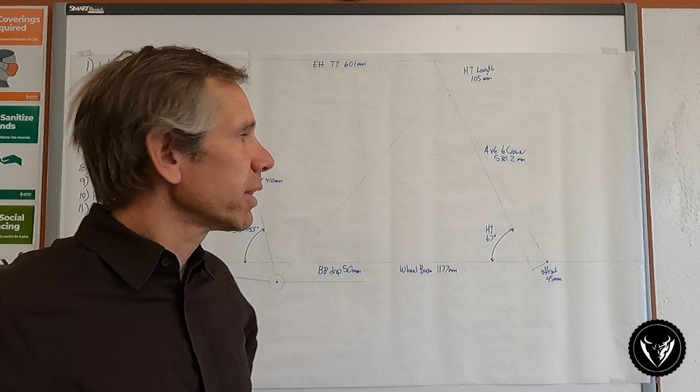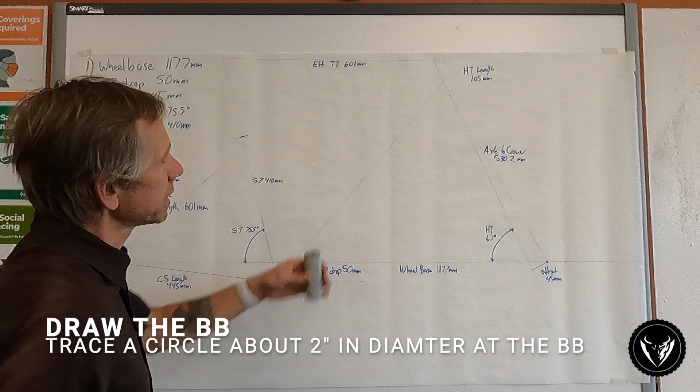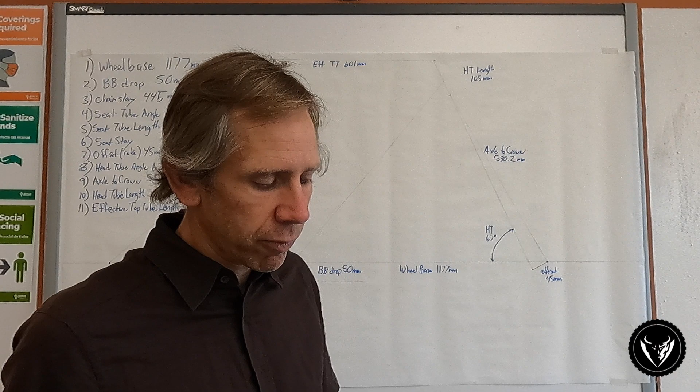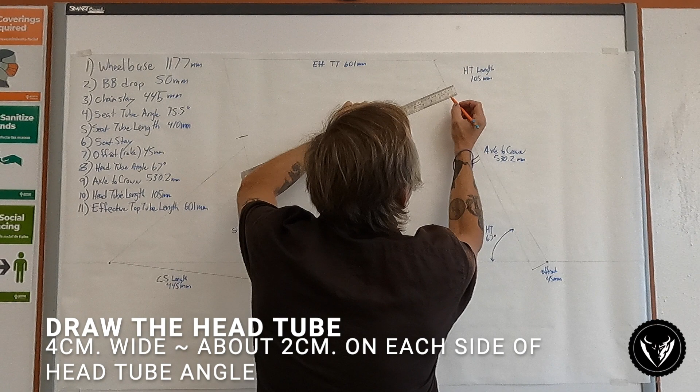All right, now that we've got all the angles and the skeleton of the bike frame made, we're gonna start drawing the tubes on top of that. I've drawn the BB right down here. Next thing I'm gonna do is the head tube. The head tube thickness, or the width of the head tube, is around 4 centimeters. So what I'm going to do now is on my head tube here, if it's 4 centimeters, I can put 2 centimeters on one side, 2 centimeters on the other side.

Do the same thing up here. Put 2 centimeters on one side, 2 centimeters on the other side. Draw myself a nice perpendicular line. And then connect my 2 centimeter marks. So there's my head tube.

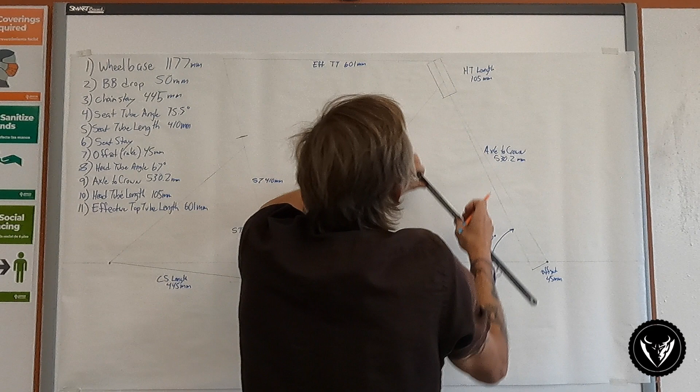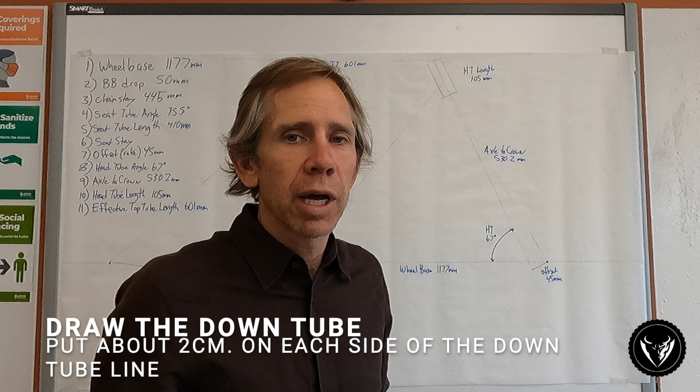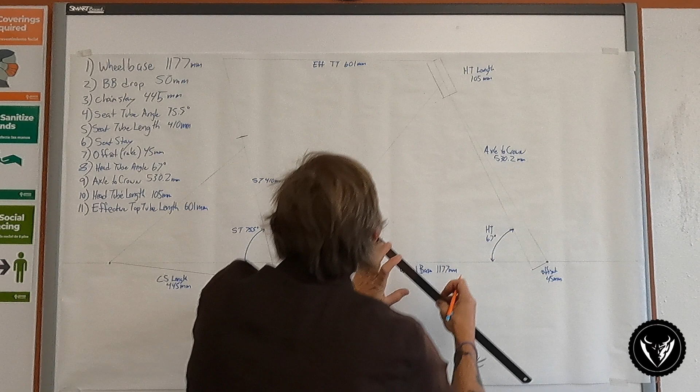All right, now my down tube. Down tubes can be all different thicknesses. I think I'm gonna stick with that 4 centimeter thickness just for right now. So I'm gonna do the same thing. I'm gonna come up here off of that line earlier. I'm gonna mark 2 centimeters on the top, 2 centimeters on the bottom. Come down here and do the same thing. 2 centimeters above it, 2 centimeters below it, and then I can connect those lines.

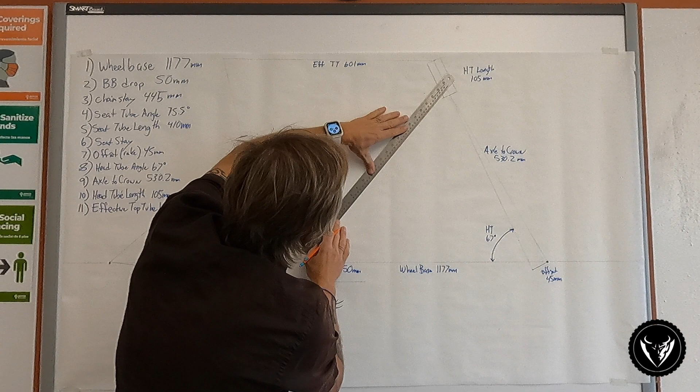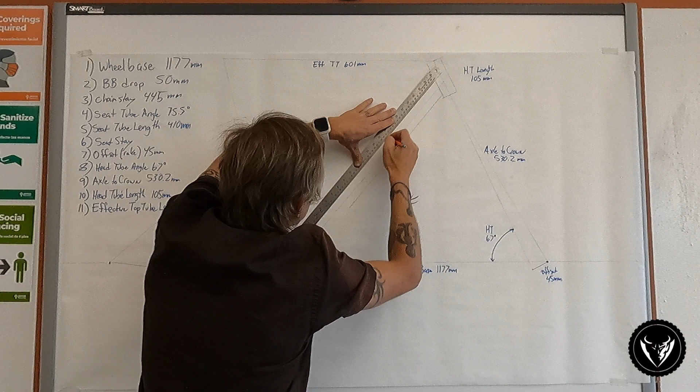One of the things you really want to be careful of is making sure that the bottom of your down tube has some room here at the head tube. So again, connecting my line above it. And then I'm going to bring that line all the way down to the bottom bracket. All right, so I got my head tube drawn, down tube drawn.

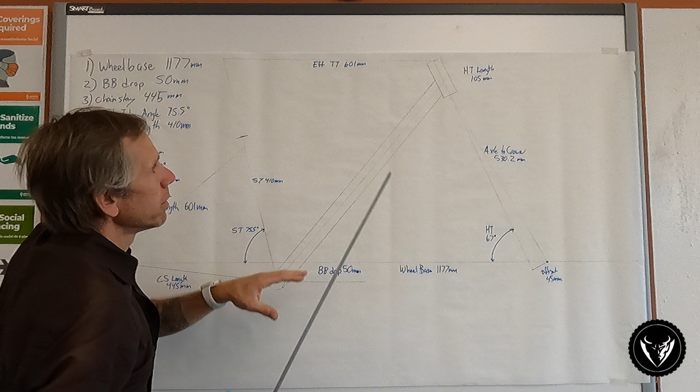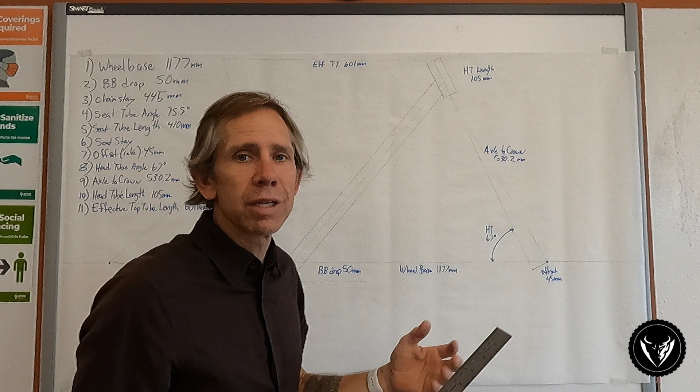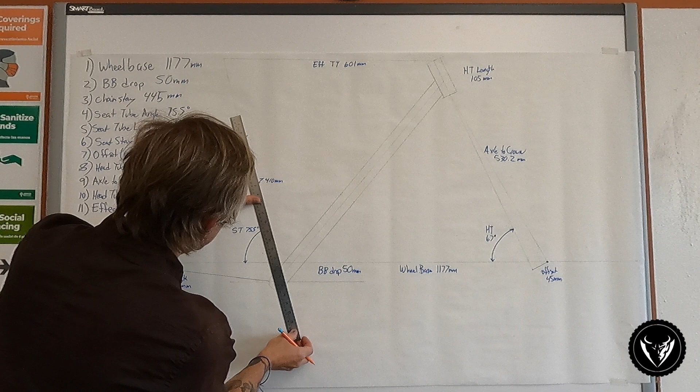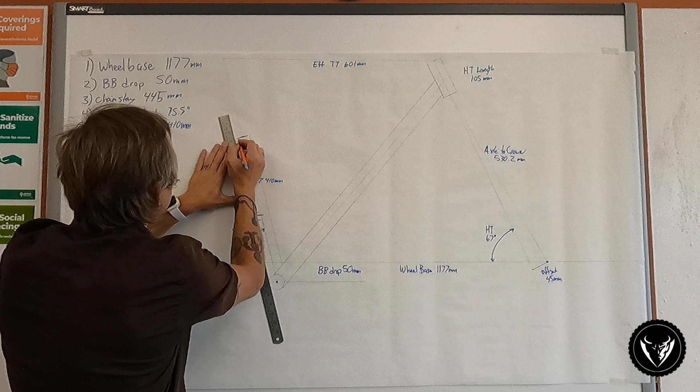Now let's go ahead and draw the seat tube. Again, I want to stay with that 2 centimeters on each side. So using my ruler, 2 centimeters here, 2 centimeters there. Come down here, 2 centimeters here, 2 centimeters there. Now in reality, if you knew the diameters of the tubes that you were going to be building your bike with, you could actually measure all those. But for right now, we're just going to use kind of the 2 centimeter rule. I'm going to connect those again. So there's my seat tube.

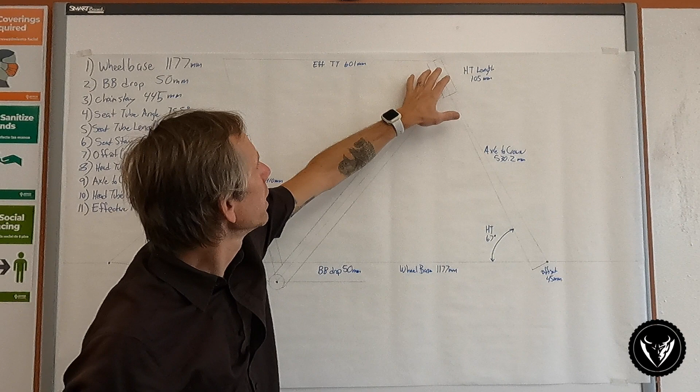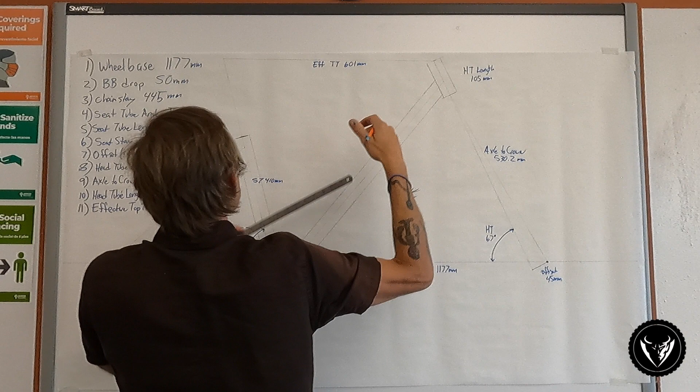I've got my seat tube drawn, and now I need to connect my seat tube up here to my head tube. I want to give a little bit of space here at the top of the head tube, and this will be the top of my top tube. And again, I don't want that to hit here on my seat tube. I need to go down a little bit. We usually have a seat collar or some sort of clamp. So I'm just going to go down about 1 inch and connect these 2 lines. When I'm connecting these lines, I'm going from the outside of the tube to the outside of the other tube. All right. So there's the top of my top tube.

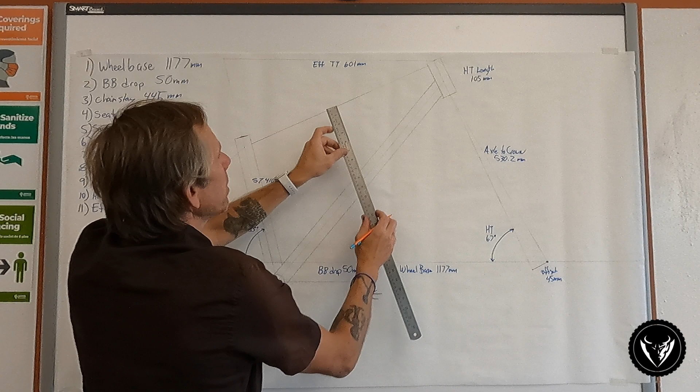This one I'm going to make a little smaller. I'm going to make it 3 centimeters. So I'm just going to measure right here, 3 centimeters. Measure right here, 3 centimeters. So this will be the bottom of my top tube. And again, I'm just connecting the outside of my head tube to the outside of my seat tube.

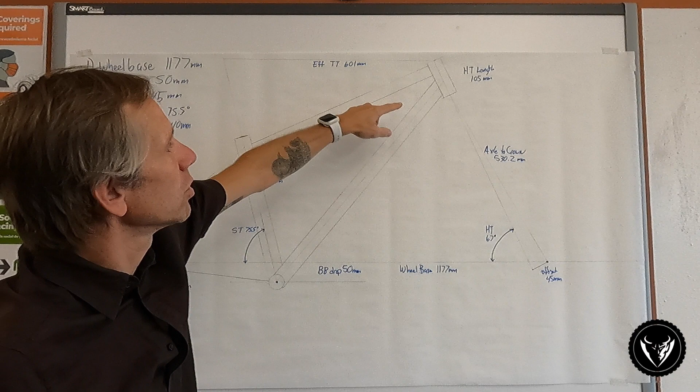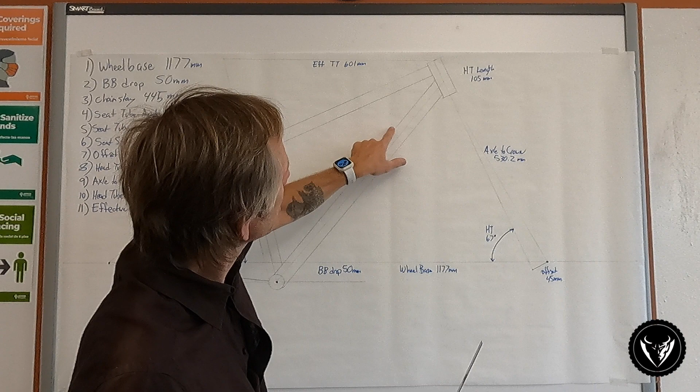And now I'm going to just draw the middle line, or the center line. It's always really nice when you have a frame drawing if you can see the center line of the tubes and the outline of the tubes. My center line, I'm going to try to draw a little lighter. If you notice here, I'm drawing darker on the outside and trying to do a little lighter on the inside.

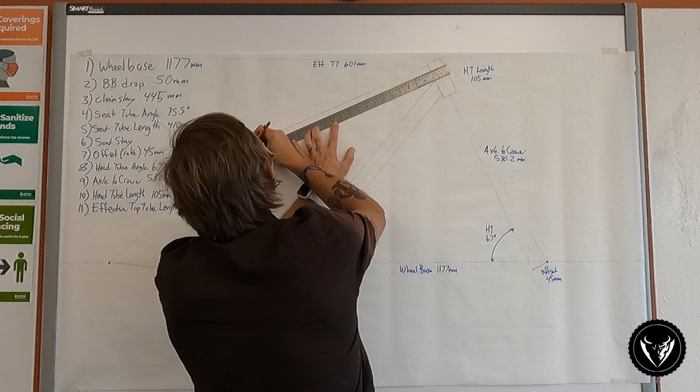So here I'll be connecting the center line of the seat tube lightly to the center line of my head tube. All right,

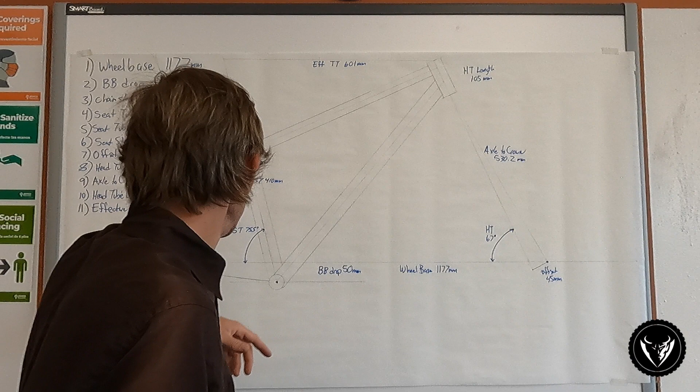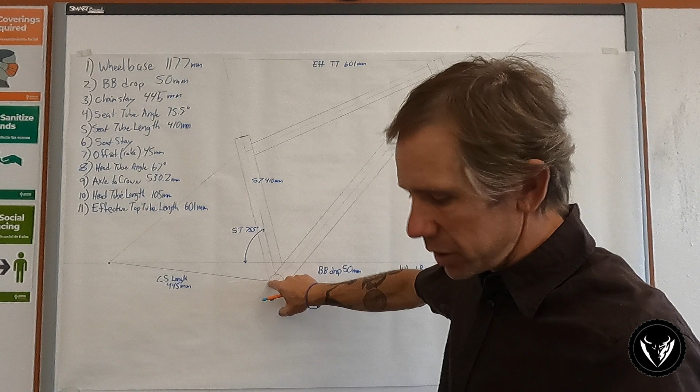now that we've got the front triangle done, we'll work on the rear triangle. The rear triangle, again, those tubes are going to be smaller diameter tubes. So what we'll do is we'll probably just use 2 centimeters here on the chainstay, and then we'll probably use 2 centimeters up here on the seat stay.

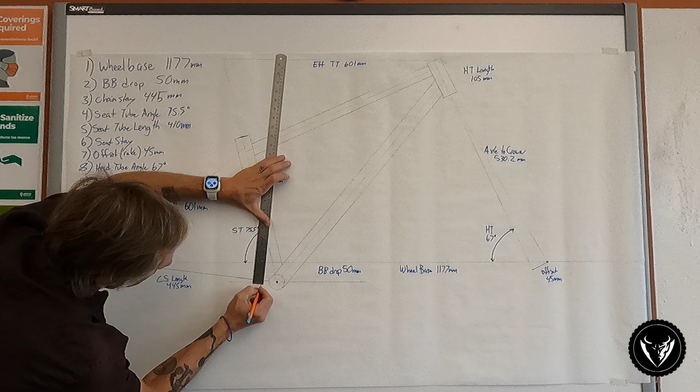So this time I'm going to center my ruler. I'm going to put a centimeter below it, centimeter above it, come over here, put a centimeter below it, centimeter above it. I'll do the same thing, and then now I will connect those, and we'll go from the outside of the bottom bracket to our dropout area. Same thing here. Again, darker lines for the outside of the tubes.

I got the chainstay drawn, and then now I'll do the seat stay. Seat stay, same thing. I'm going to use that 2 centimeters. So I'll put a centimeter below, centimeter above, come down here, centimeter below, centimeter above, connect these with darker lines. All right. So there you go.

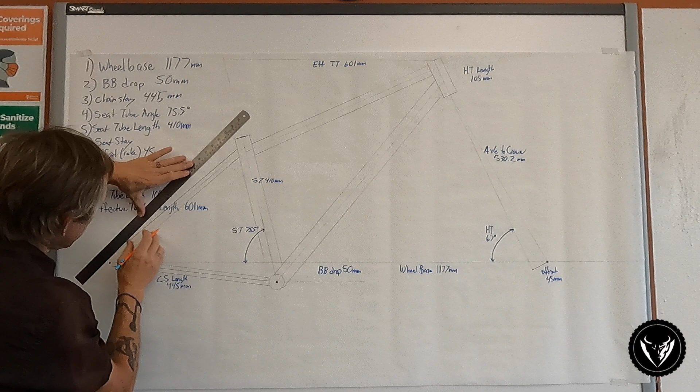Congratulations, you've drawn your first bicycle frame. We're gonna practice this a couple more times before you start working on the real frame that you'll make. But I hope you understand that process. It can be a little overwhelming, so hopefully you've taken a chance to take the video, stop it, pause it, do your lines or your measurements, and then do the work, and then watch the video, stop it, pause it, do your work. Because trying to watch this and do it afterwards might be a little challenging.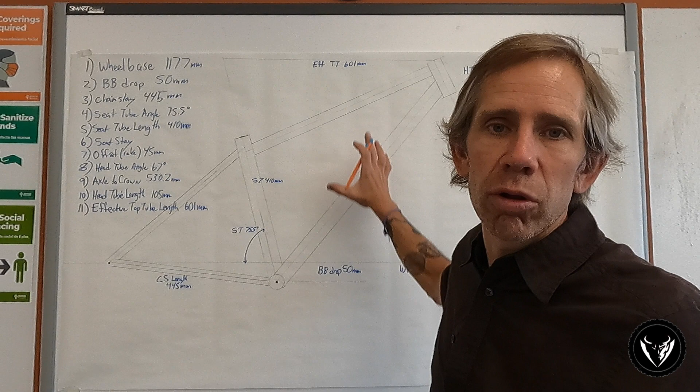But my next thing I would do is I'm actually going to go through and I would color this frame in, so that way we can actually see on this piece of paper where the frame's at.

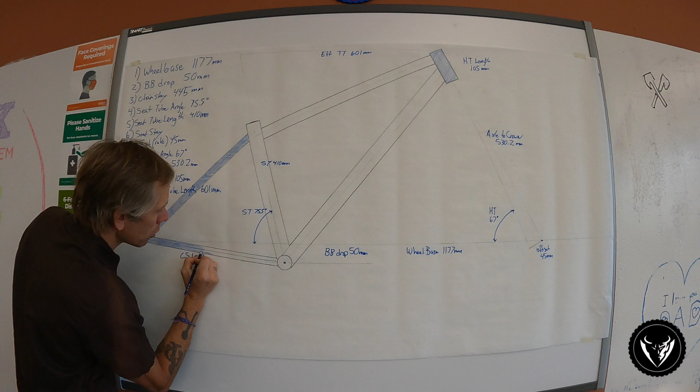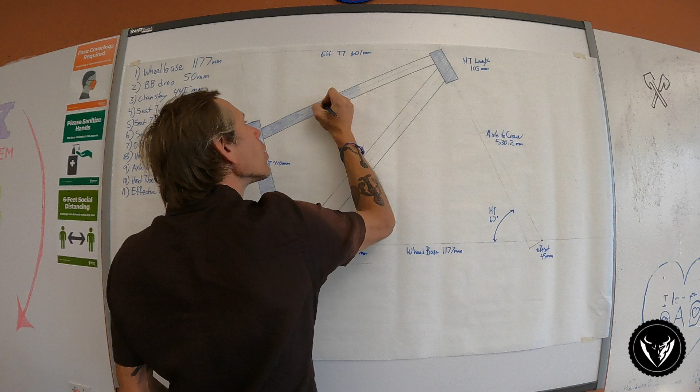All right, as you can see, I got my frame drawn and colored in. The first thing I did was I outlined it, and I used a kind of a darker black marker to do that. You can kind of choose however you want. And then the next thing I went to is I colored it in. You can kind of color it with anything. I use colored pencil, you could use crayon, you can use marker.

But now you can see I've got a completed frame drawing. I got all my tubes labeled, and I got my angles marked, and the frame's colored in, and so now it looks like a real bike frame. So good luck with it. I'm excited to see what your designs and colored in frames are going to look like. So feel free to be creative with it. I was kind of rushed for time, so I just filled it in blue, but you can kind of do what you want with it.

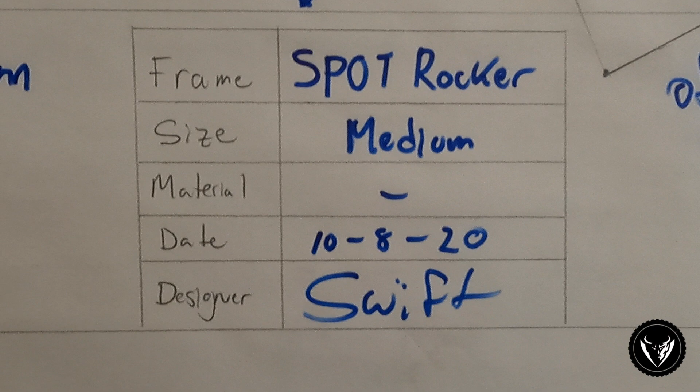So let's take a look at the title block that we have for this bike frame drawing. So on our title block, we put SPOT Rocker, and it's a size medium. We've got the date, and we have my name for the signature for the designer. So when you get done with your bike drawing and you've colored it all in and made it pretty like this one, make sure that you go ahead and throw your title block in at the bottom.